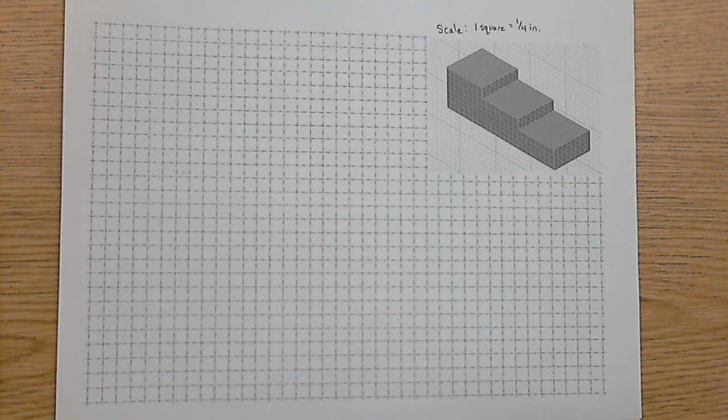So as you can see here in the top right hand corner, we have an isometrically drawn shape. Okay, so we have isometric graph paper, and you can see here's our shape. We can see the front, the side, and the top view on that 30-degree angle to the horizontal line. So before we start drawing our orthographic projection, there's a few things that we need to do to the isometric view to make sure that we draw this correctly.

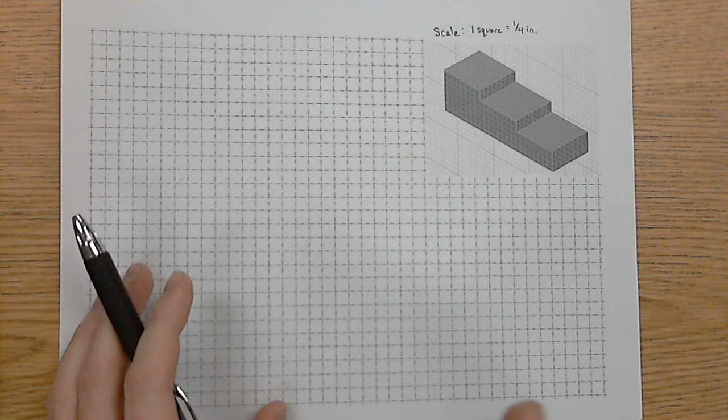Just one thing to mention before we get started. The scale, 1 square is equal to 1/4 inch, doesn't become important until we actually dimension the orthographic projection. In this video, we're just going to draw the orthographic projection, and we'll dimension it in a separate video. So for this video, you need to know that each one of the squares on the isometric shape is equal to one of the squares on the orthographic graph paper.

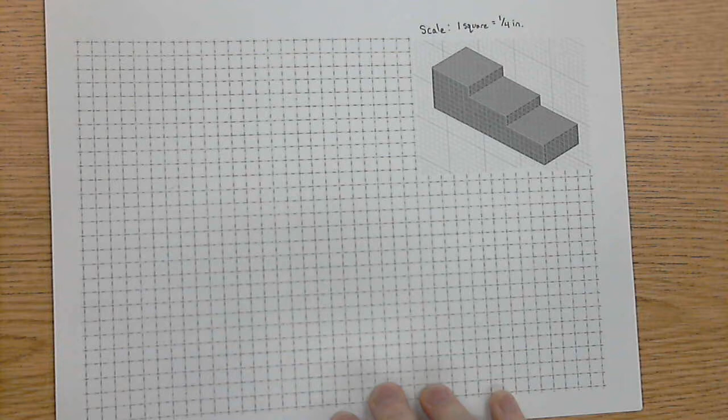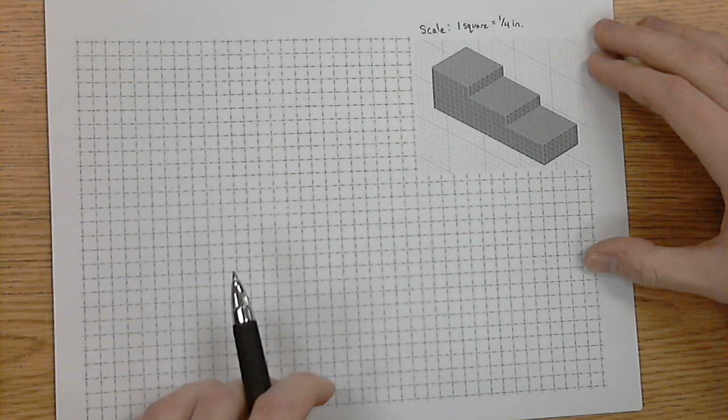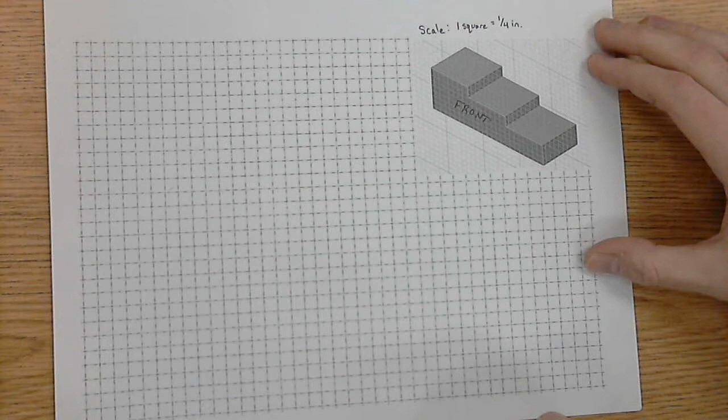Okay, so let's go ahead and start by looking at our isometric view and figuring out our front, our side, and our top views on that. Our front view is going to be the view that shows the most details of the shape, which is going to be this view right here. So I'm going to go ahead and label that front. Okay. Our side view is going to be our right side view, which would be over here. And then we have our top view, which would be on the top.

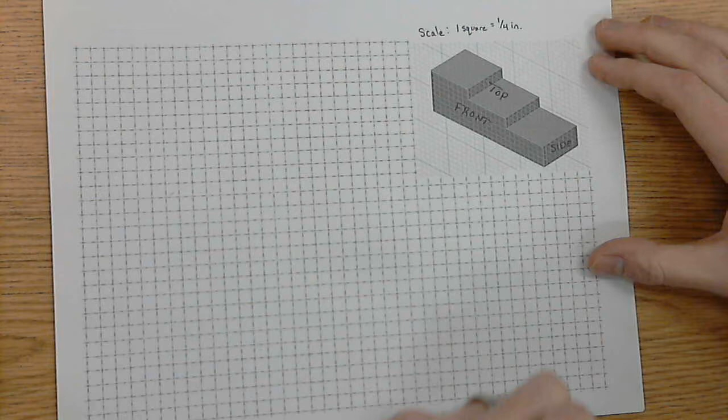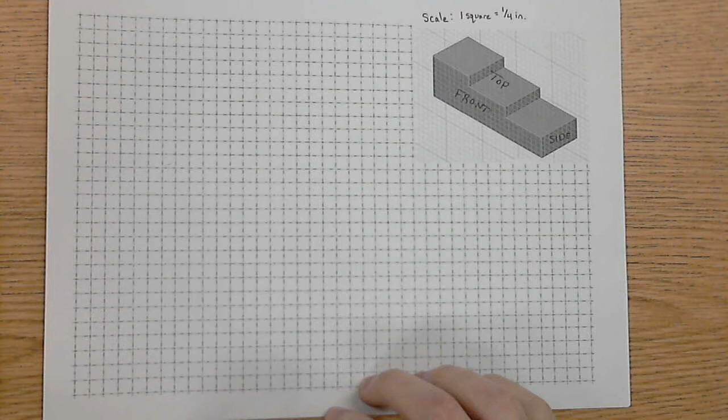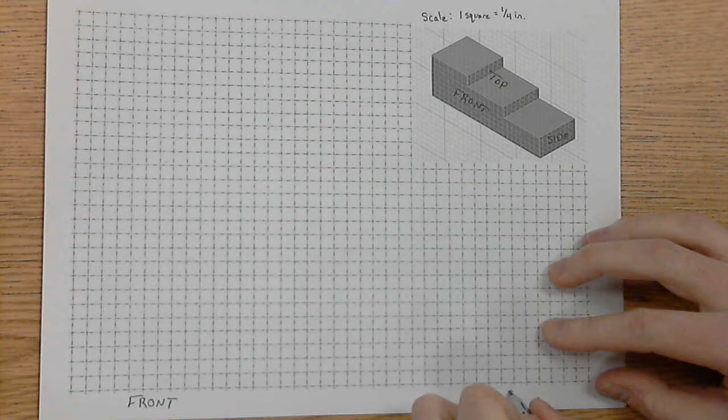Okay. Now when we go to draw an orthographic projection, like you've learned in class, the front, the side, and the top view have a very specific place that they go. We don't put front, top, and side in different places. They're always in the same place. So in the bottom left-hand corner, we're going to label this front, because that's where our front view goes. To the right side of our front view is our side view. So we'll label that side. And above our front view is going to be the top view. So go ahead and label top. Great. Now that we have our sections of graph paper oriented with labels, we can go ahead and get started.

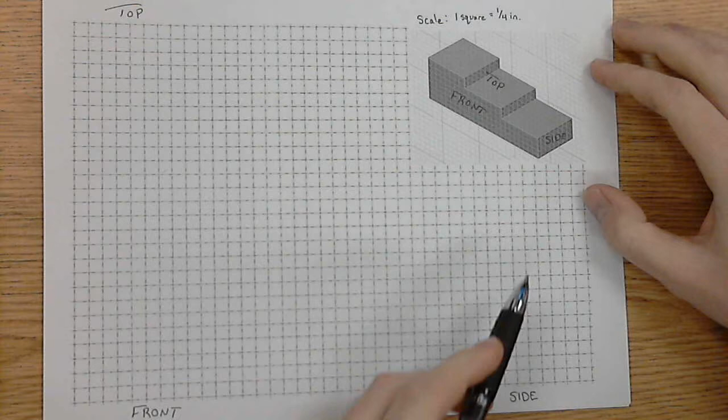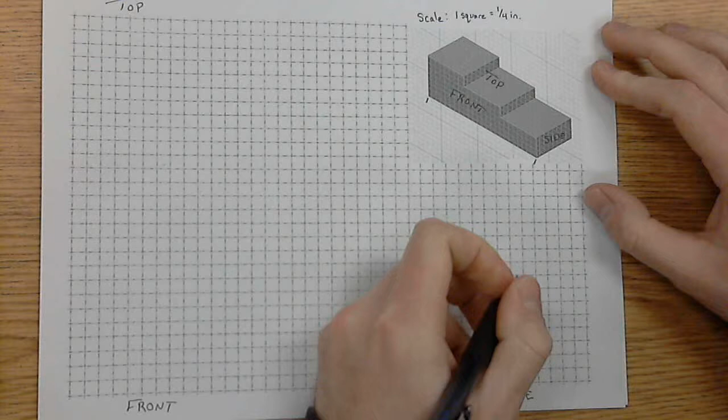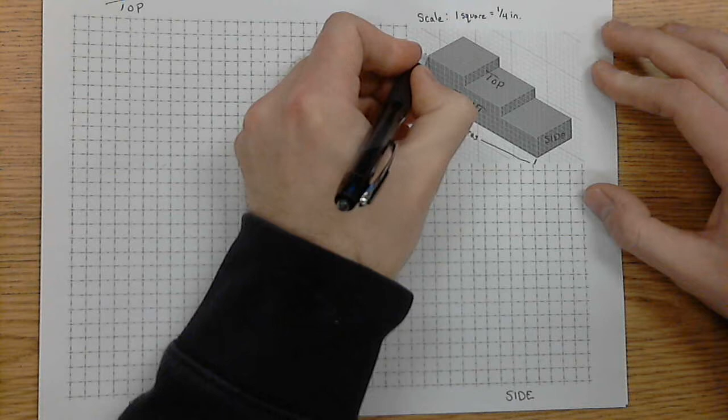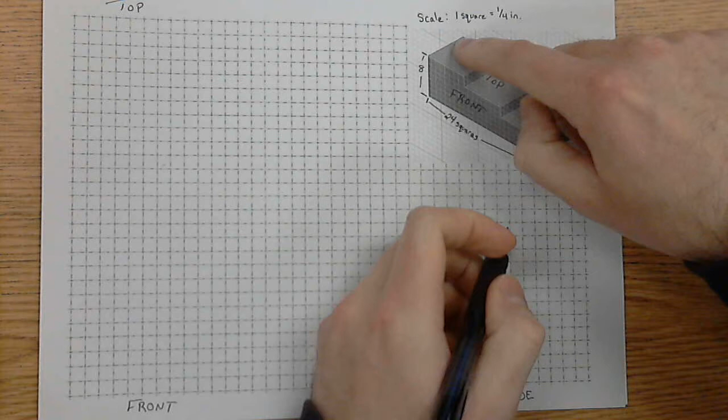So the next step on your isometric view here is to figure out how many boxes each dimension is, or each section. So here's the width. We're going to start with the width. And if you were to count all of these up, you would come to the conclusion that between this point and this point on the shape, there are 24 squares. That 24 squares is going to be equal to the 24 squares we make down here. Now we can continue to go all the way around the shape and count up all the squares. So we'll go clockwise here and go up to the height. The height would be 8 squares. Now we have the depth. The depth is also going to be 8 squares.

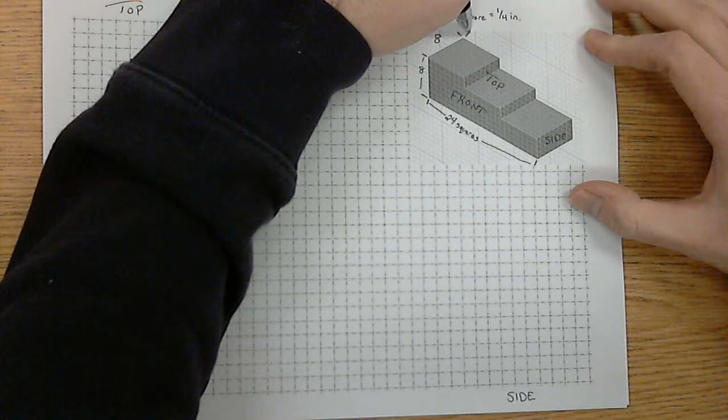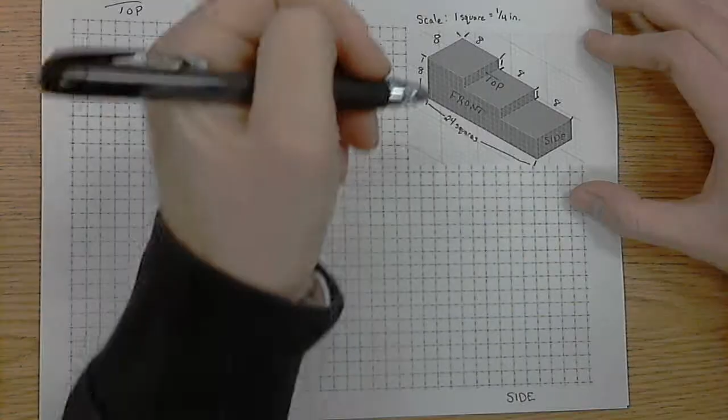This whole piece here would be 24 squares, but we want to break it up into sections because we have these little steps that come down. And those are going to be important when we go to draw our orthographic projection. So from this corner to here is going to be 8 squares. And this corner to this corner is going to be 8 squares. And then this corner to this corner is going to be 8 squares. Now if you notice, there are two sections, 1 and 2, the two steps that we didn't label. Those are each 2 squares apiece. Okay, so it drops down 2 squares.

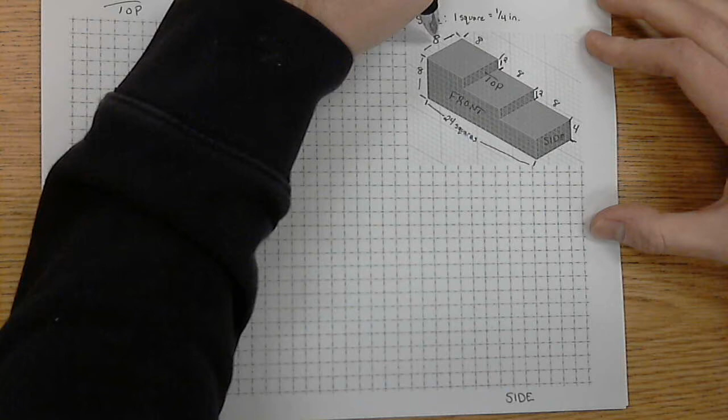And then we have another step here from this corner down to the bottom of the shape, which is going to be 4 squares. And then the last measurement we have is the depth again, which would measure this number here because this depth is the same as this depth in the shape, which is 8 squares. Now remember, we are talking in squares here, not in inches.

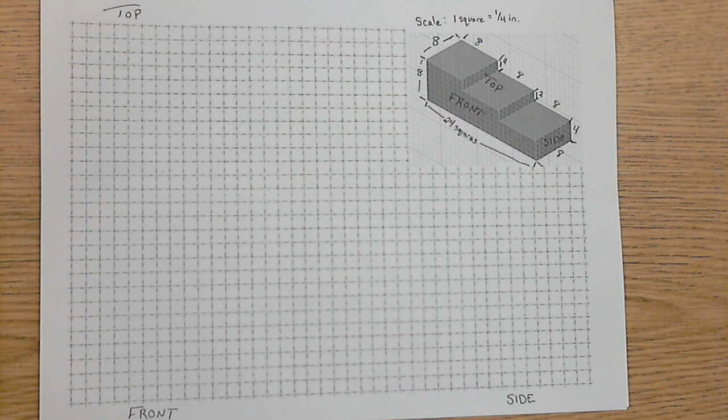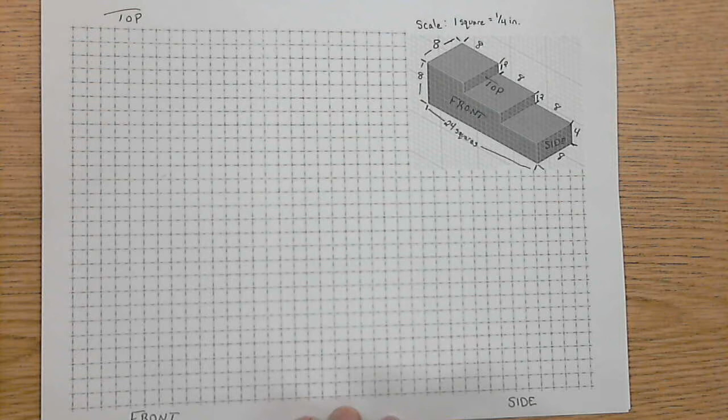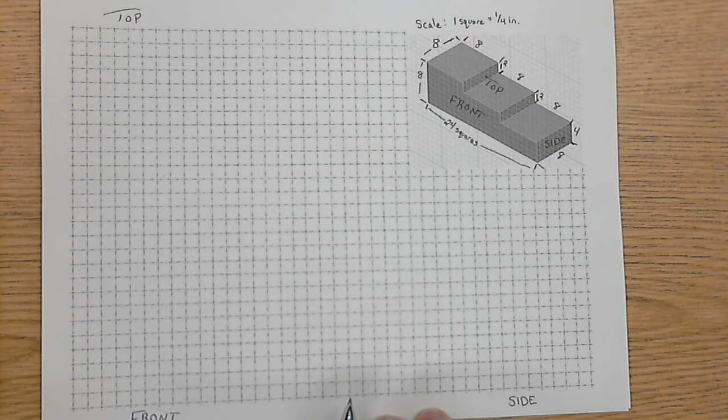Okay. So let's go ahead and start with the front view. We're always going to start by drawing the front view first. And as you can see, our longest dimension here, the width, is going to be 24 squares. This is a pretty large shape to fit on this graph paper. It does fit, but in order to make it fit, I'm going to start all the way over here on the end. And I'm going to count 24 squares out and draw my line. So let's go ahead and start with that.

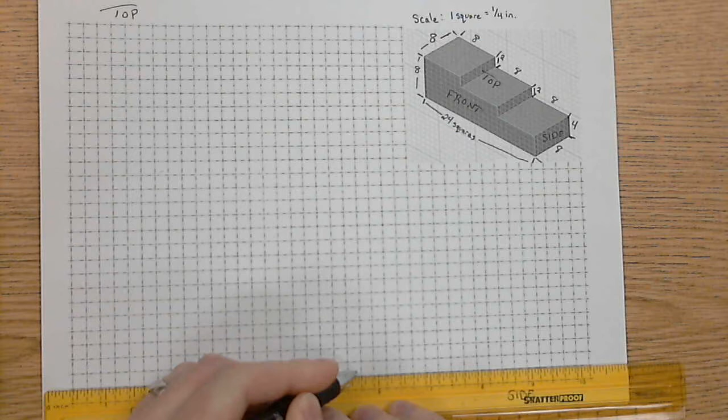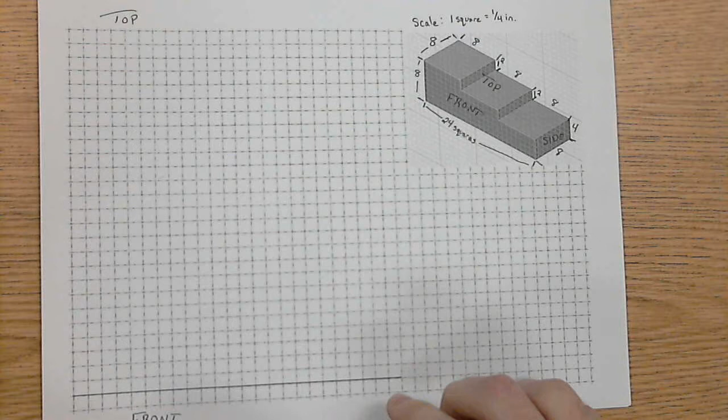1, 2, 3, 4, 5, 6, 7, 8, 9, 10, 11, 12, 13, 14, 15, 16, 17, 18, 19, 20, 21, 22, 23, 24. Once you've got your 24 squares, make your line. And great. Now we have our width, 24 squares. Next up, I'm going to go 8 squares up in height. Come over here, count out 8. 1, 2, 3, 4, 5, 6, 7, and 8.

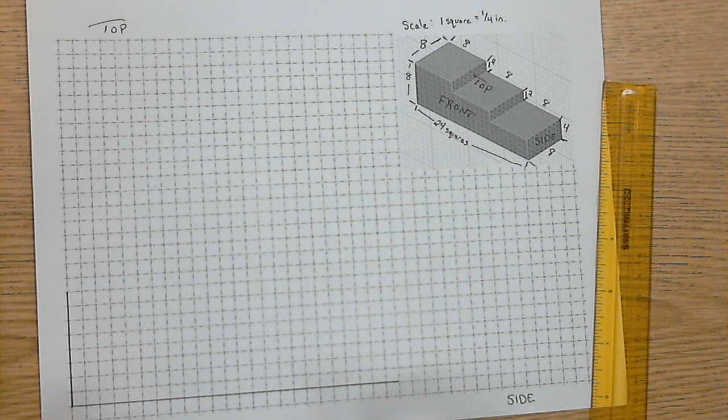Connect my lines. Notice how I'm doing my best to make sure these lines are incredibly straight. You want everything to be very precise when you're making these orthographic projections, so that if you were to give your blueprints to somebody else, they would be able to follow them easily.

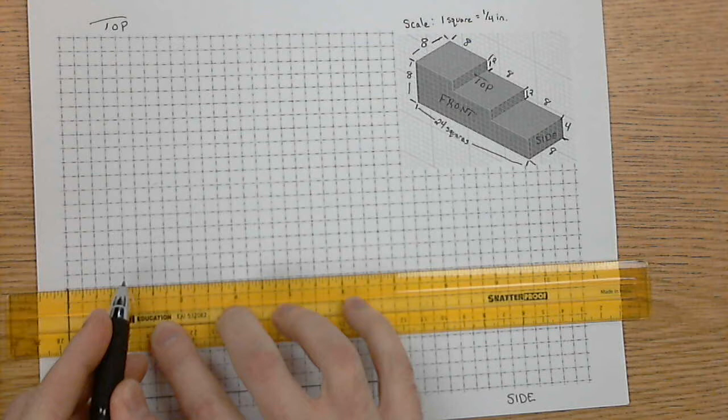Okay, so now I need to start with my 8 square boxes, which have 2 steps going down. So we're going to count out 8 going over. 1, 2, 3, 4, 5, 6, 7, 8. That's going to go over to the corner. And then we need to come 2 boxes down for our step. 1, 2. And we're just going to continue that pattern. 8 over, 2 down.

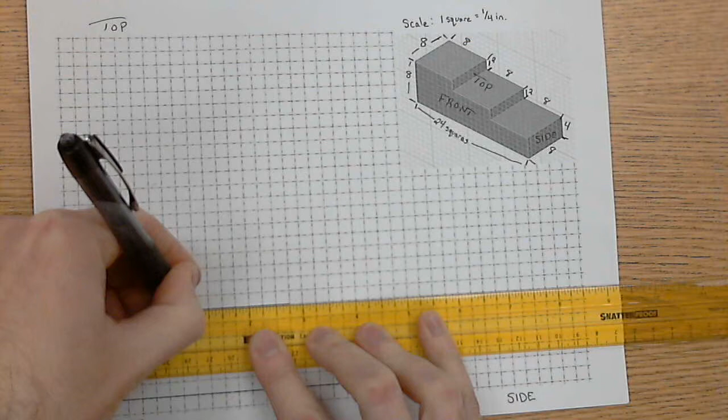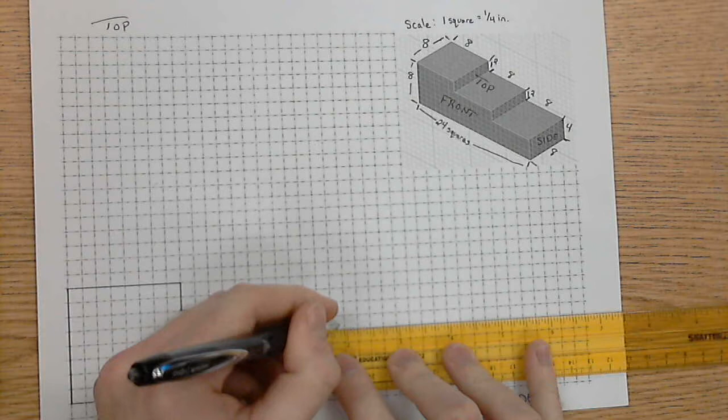Now if we did this correctly and made our counting correct, this line should end right here and be 8 boxes. And it looks like we're right on point here. So now if you can see, I have 4 boxes here for that dimension, and I've got 4 boxes right here. So let's connect those 2 lines. And I have successfully drawn the front view of this object.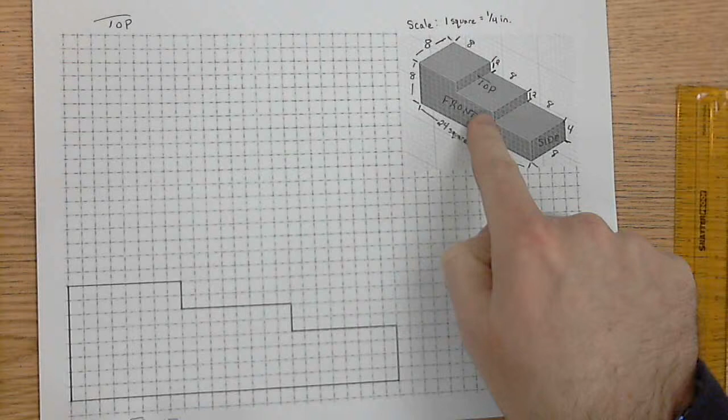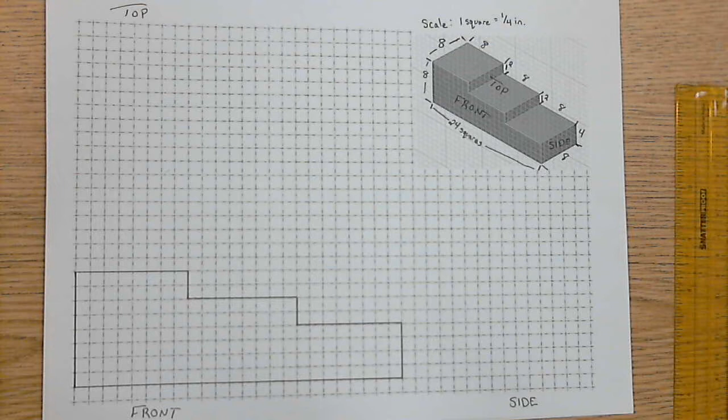So up next, we're going to start with the side view. And what I want to make sure that I do here is that I go far enough over to leave enough room to draw the entire side view on the graph paper, as well as leave myself some room for dimensioning. I don't want to start drawing my side view just 2 boxes away. So I'm actually going to draw my side view 7 boxes away. So as you can see, my side view is right here.

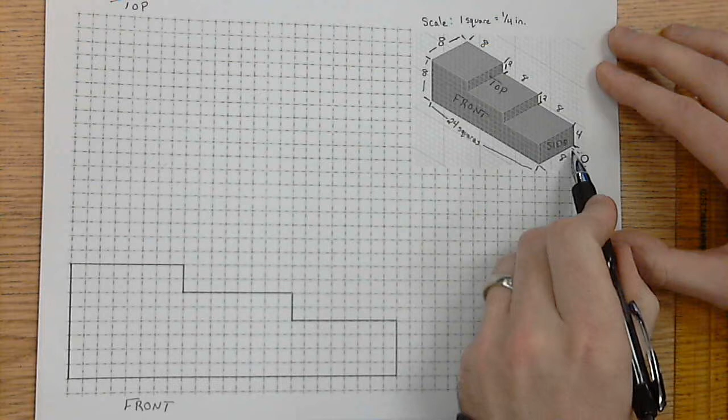So you can think of the side view as if you were standing on the side of the object and looking at it from this perspective. What would you see? You would see this box, you'd see this box, and you'd see this box. So let's count over 7 boxes, and then we'll start drawing our line, which will be 8 boxes wide. 1, 2, 3, 4, 5, 6, 7. I'm going to start my line right there. 1, 2, 3, 4, 5, 6, 7, 8. Good. So now I have 8 boxes wide.

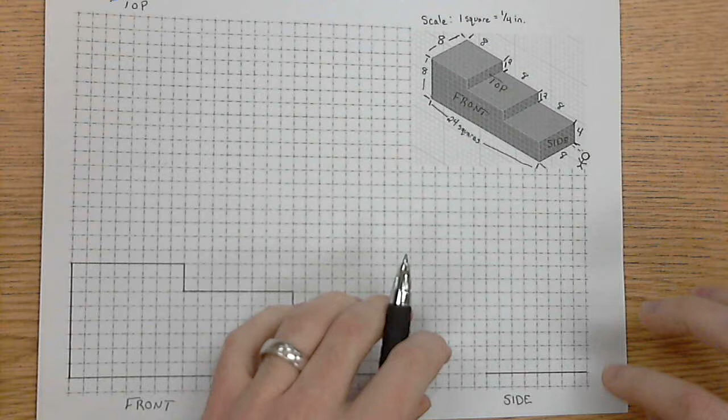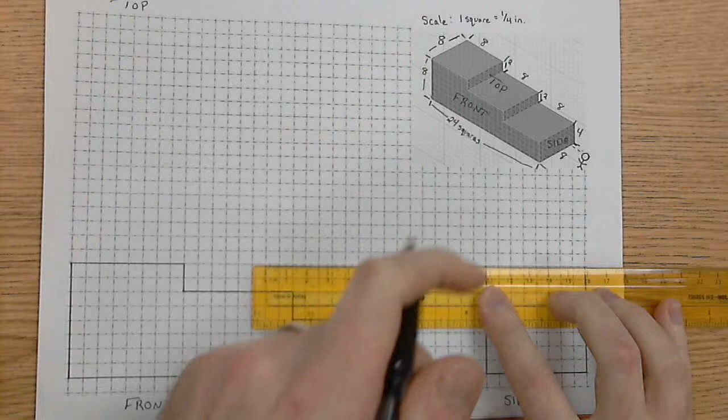My total height of my shape is going to be 8. So we're going to go up 8 on each side, and then connect them back together. Now we can connect them. Good. Now, if you notice, if I'm standing here on the side of the object looking at it, this is not exactly what I'm going to see. There's a step or a line right here and right here, and I would see those two lines.

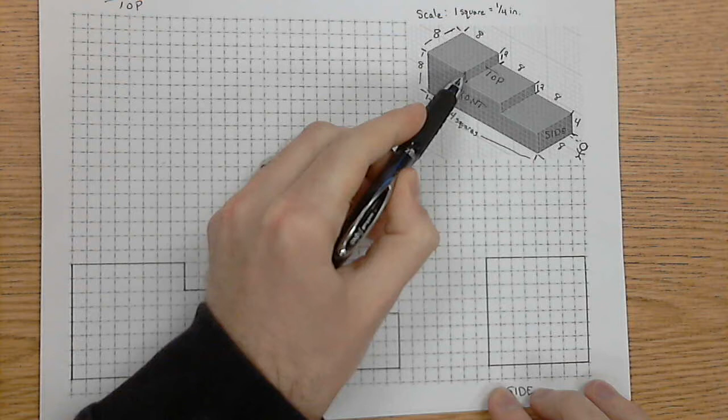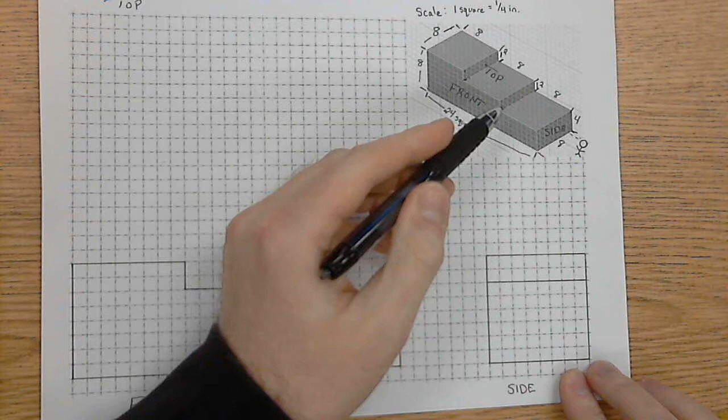So what I'm going to do is start from the top, because this line right here is represented by that line, and I'm going to count down 2 boxes and draw another line. So 1, 2, and I'm going to draw an object line. This is an object line, not a hidden line, because I can see the line. Now I need to come down. This is another 1, 2. And draw my line. And now I've completed my side view.

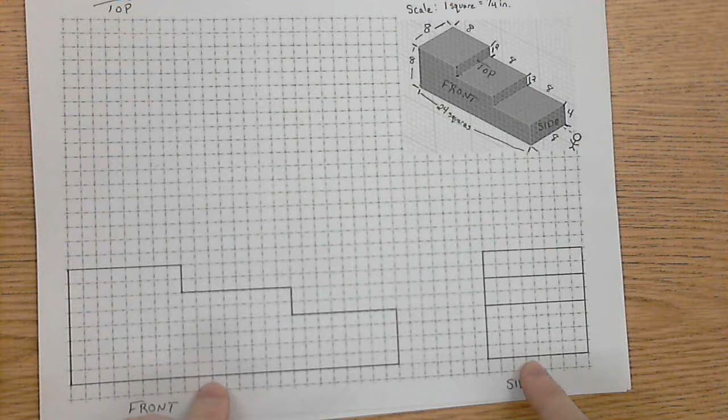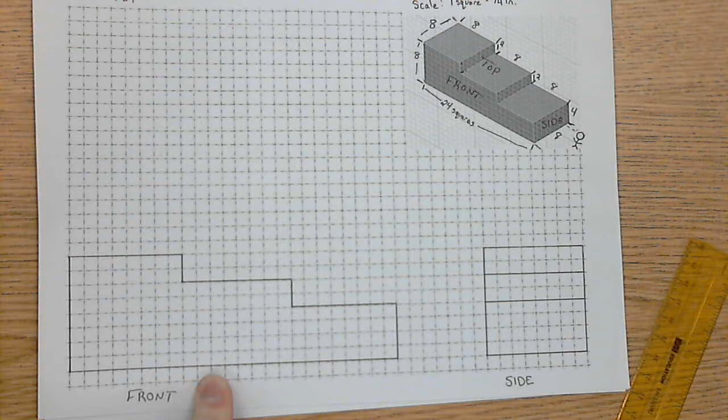Please notice how the front view and the side view, the bottom line is on the same line of graph paper. You want to think about your orthographic projections as your shape unfolding on the same lines. So I wouldn't want to take this side view and draw it up here. I want everything to be lined up very nice on the same lines. So having said that, when I draw my top view, this portion will be up here. Again, it'll be on the same 2 lines, so everything's lined up correctly.

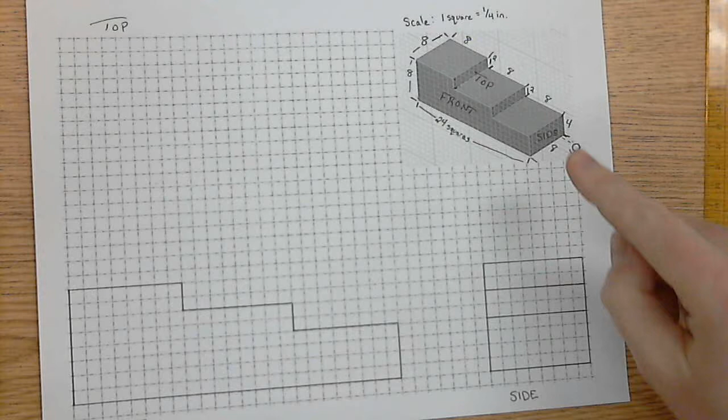So let's go ahead and start drawing the top view. Now the top view is what the shape's going to look like from the top. So I like to think about it as, well, what would this shape look like if I was flying in my fighter jet over top of the shape? What would I see? Well, I would basically see these 3 squares. So we're going to go ahead and start drawing those.

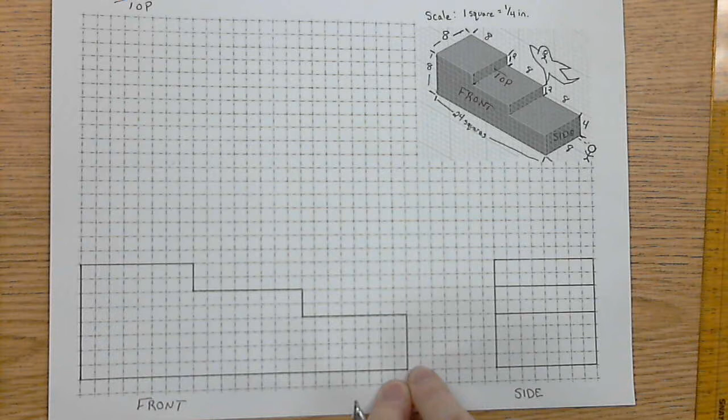Now, as you remember, I have 7 boxes in between my front view and my side view. We're going to keep that consistent, and we're going to count up 7 boxes and then start drawing our top view. So let's go up 1, 2, 3, 4, 5, 6, 7, and I'm just going to put a little dot to remind myself that's where I start, that corner.

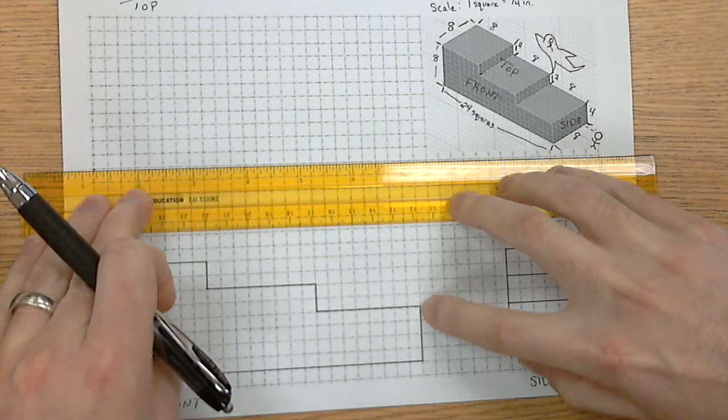So we'll start with width. How wide is the shape? Well, you probably already know that because you drew it out. It's 24 boxes. So as you can see here, it's on this line. Here's 24. We can just line them up real easy, and we don't even need to count. 24. Good. The depth of our shape is 8 boxes.

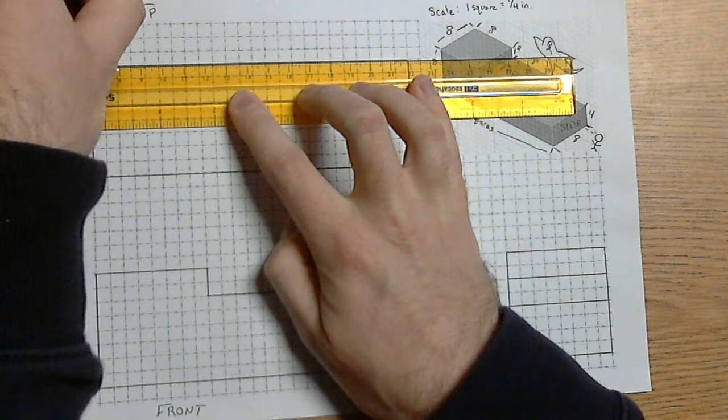So we're going to go up 8. 1, 2, 3, 4, 5, 6, 7, 8. Same thing on the other side. 8 boxes. And then we just need to make the line that comes across the back end. Good. Now, I'm not done with my top section yet.

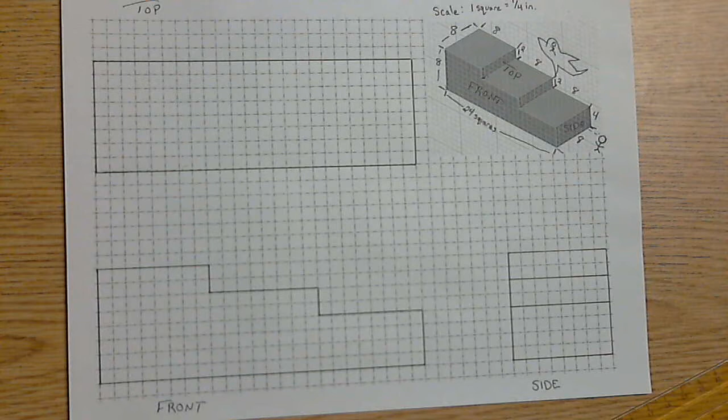As you can see, we have these step downs. And if I was directly over top of the object, I wouldn't know that those are steps that come down in increments. But I would see a line there. So what we're going to do is count over from the corner 8 boxes, draw a line, and then another 8 boxes, and draw another line to represent this line here and this line here.

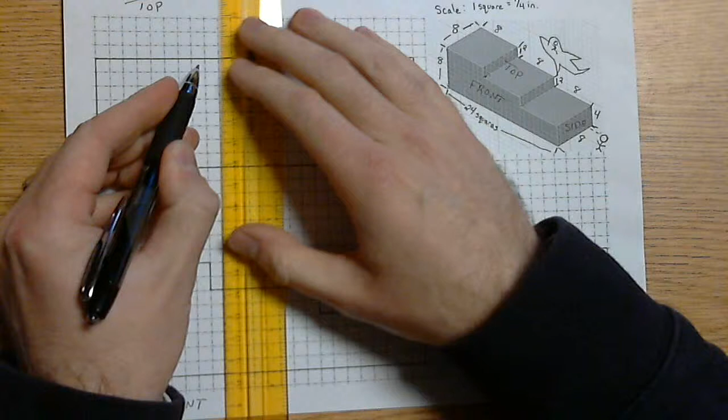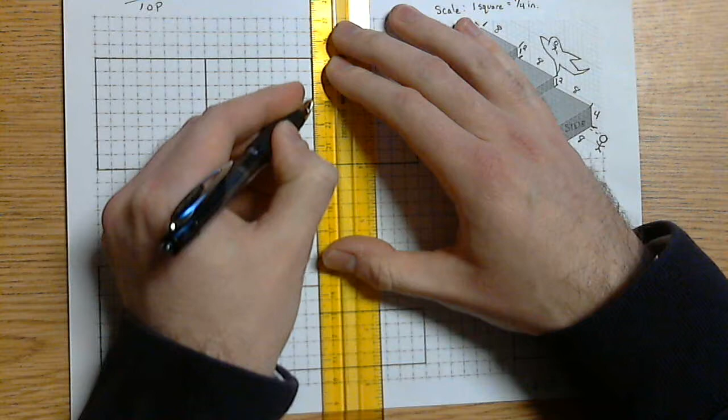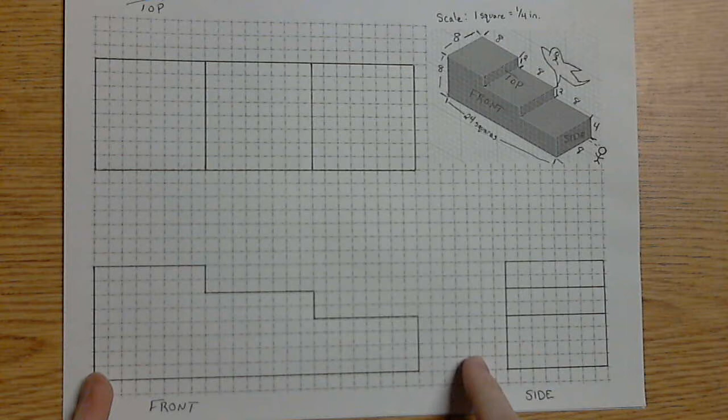Perfect. Now we've completed our orthographic projection. We have our front view, our side view, and our top view. And as you can see, every view is lined up on the same lines and they are equally spaced. So in the next video, we're going to stay with this shape and we're going to start to dimension it using this scale of 1 square is equal to 1/4 inch.